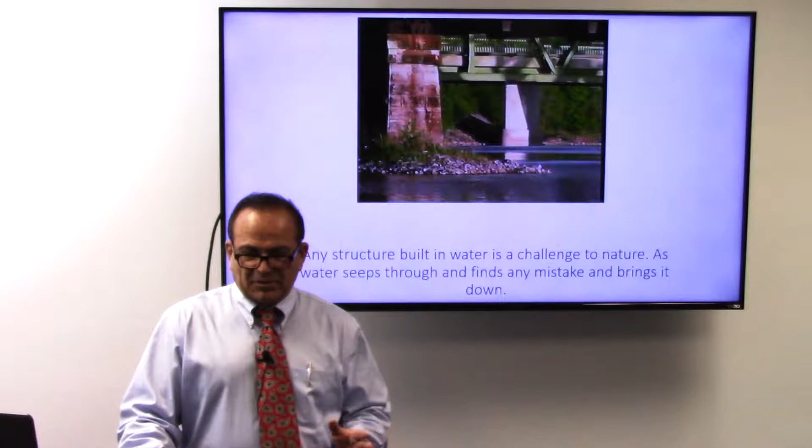At the day of the accident, a volunteer firefighter in upstate New York witnessed the accident, and some of his statements that he has made we're going to use for this course.

Schoharie Creek is a concrete bridge similar to many bridges that we see every day and cross over without even noticing them. On the day of the accident, April 5th, 1987, a large white truck was on its journey to New York through a main commercial highway. The truck was heading westbound on Highway 90, carrying a very heavy load of paper.

On the day of the accident, it started raining in the area, and it started raining very heavily. The truck driver pulled into a local restaurant to have his breakfast and then got back on the road.

As the volunteer fireman witnessed it, the water on the creek kept coming up and was rising fast. The flood alert emergencies were sounded, and the flood waters got very close, up to a point that they were going to close all the bridges. Some of the bridges were getting covered by water, and at one point Route 5S across the creek, just north of the freeway, had its western end under water.

Eventually, all the bridges on the Schoharie Creek were closed, except the Thruway Bridge. As the water started rising, a truck carrying a heavy load of paper was going through, and all of a sudden the volunteer fireman heard a noise and a big sound, and the 18-wheeler had gone into the water, followed by a couple other cars.

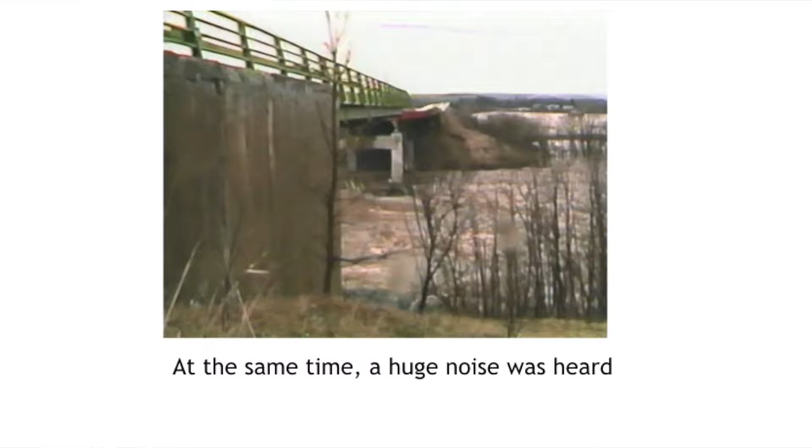Traffic came to a stop, police came to the accident site, and they saw there was a big gap in the middle of the highway, and the bridge was gone. The driver had no time to stop, and more cars followed.

The police blocked the road, and as they were surveying, the rest of the bridge started coming down. Here is some of the scene of it.

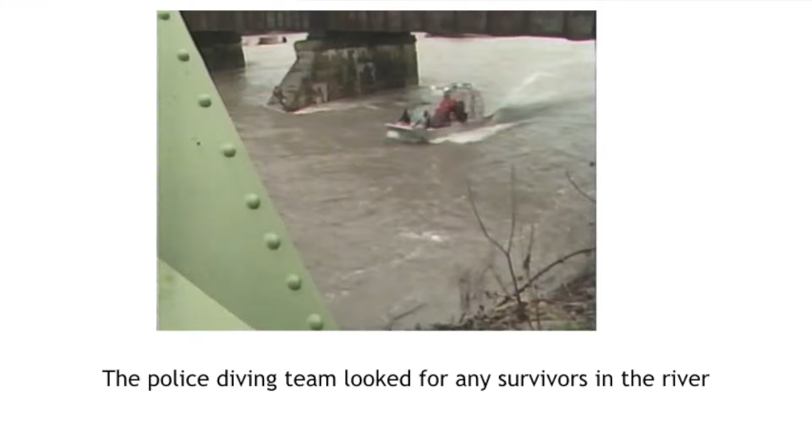At that time, some of the officials, including Governor Cuomo, came to the accident site. The police diving team surveyed and investigated the site to find any survivors, and at this time there were 10 people missing.

Governor Cuomo expressed that there was no reason for speculation about what had caused it, and they had to do the investigation until they came up with some results. The investigators looked for the remains of any human bodies for the second day, and they couldn't find anyone. 10 people had died as a result of this accident.

Now a commercial highway had been cut in half. A big piece of it had fallen into the water, and they did not know if this flaw existed in any other bridges in the state or not.

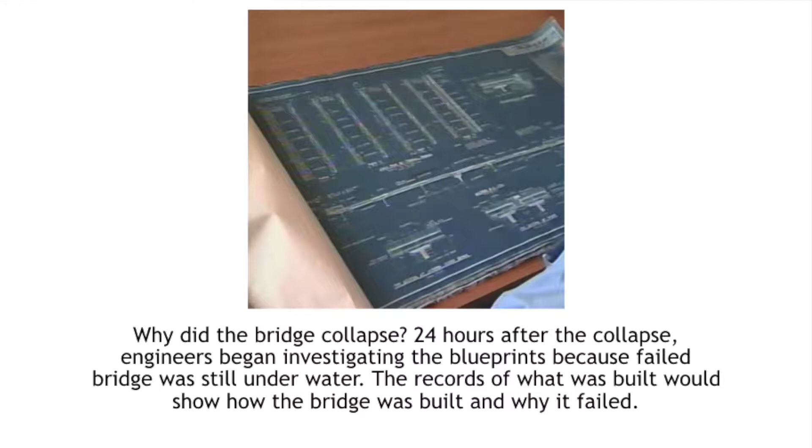10 people had died, and what they did is they decided to go over all the blueprints and see what had happened, what may have caused it, and try to find it.

This bridge had been in trouble before. There was another flood a number of years ago that had shown some problems with this bridge. The Schoharie Bridge was made of reinforced concrete and steel, and sat on huge concrete piers that rested on the creek bed. These were the bases of it.

In the 1950s, thousands of bridges and roads were built across America because reinforced concrete was simply affordable and also strong.

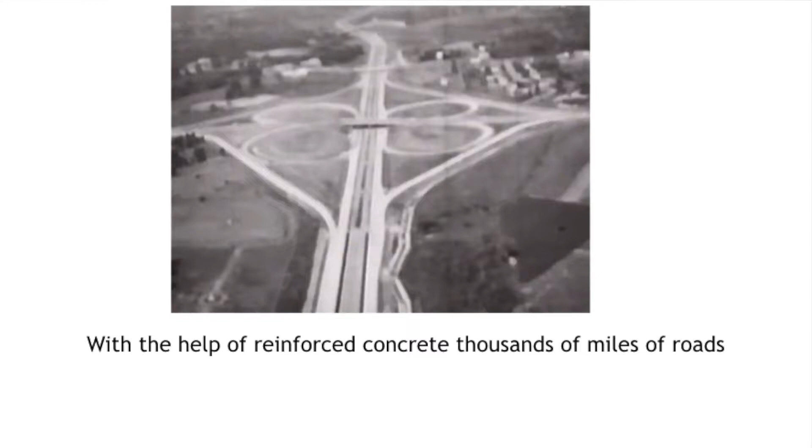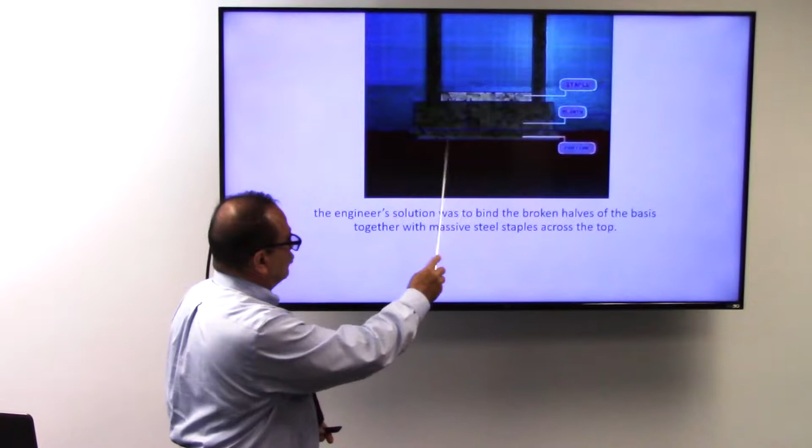Here are some examples that we see every day. The Schoharie Bridge had a problem before, because during the flood it had some cracks in the big, huge concrete base at the bottom of it on the bed of the river. So what they had done was put some steel staples on top of it in order to hold it together, and this crack does not grow any further. This was the result of a previous accident and a flood that they had.

Here is a typical example, as the water goes, of the crack caused at the base of the bridge.

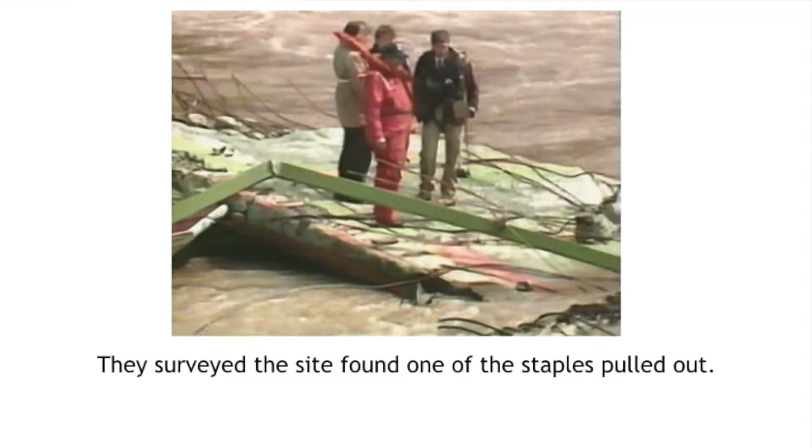Once the water started clearing, they decided to dam the area in order to get to the bottom of Pier 3 and see what had happened. They saw that some of the staples were pulled out from the base of the bridge, so they demolished the rest of the bridge in order to have access to Pier 3.

Pier 3 is this section, as you see with the red mark. The problem here is the big crack you see. They tried to drain the water, put a dam, redirect the river, and see what had caused it.

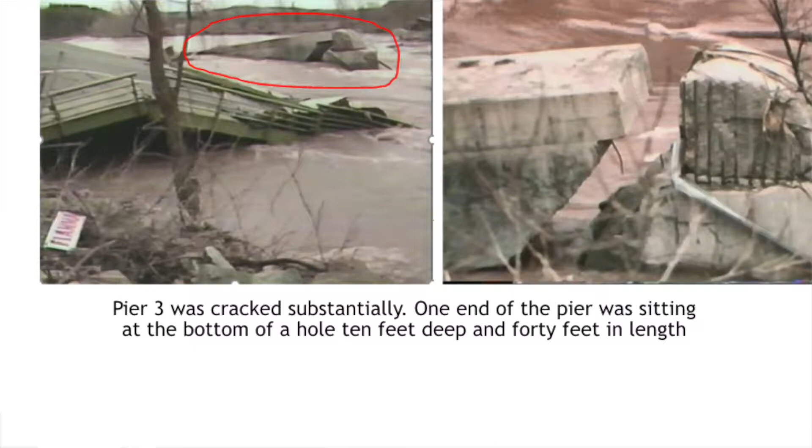Here is another picture of it. At this point, the highway is sitting at the bottom of the river. Here is another picture, and this is a blow-up of the crack showing what happened. The rest of the bridge was demolished.

This is when the water was drained and they started looking around the bridge to see all the gaps underneath and the crack in the base. They found there was a 10-foot deep gap underneath the base of the bridge, and here's the big crack that caused it. So the question was, what caused this, especially with the big hole you see underneath?

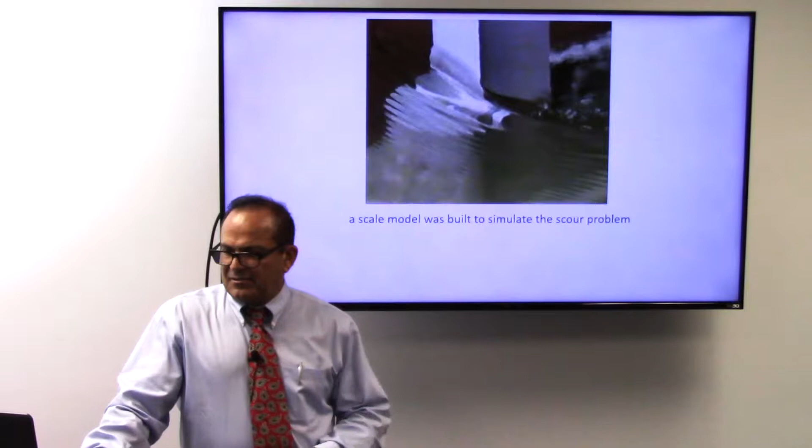A scale model was built in a hydraulic laboratory at Colorado State University. One of the biggest problems when building a bridge is scour. A scour is similar to when we are standing at the beach in the water and a wave comes in, and once the wave starts going back, it starts hollowing the sand out from underneath our feet.

That's a scour, and this is what happens to bridges also. But any civil engineer knows about scour and knows how to protect against it. When they did the simulation and test at the laboratory, they found the exact same pattern underneath the base of the bridge. The accident on the Schoharie Bridge had been caused by scour.

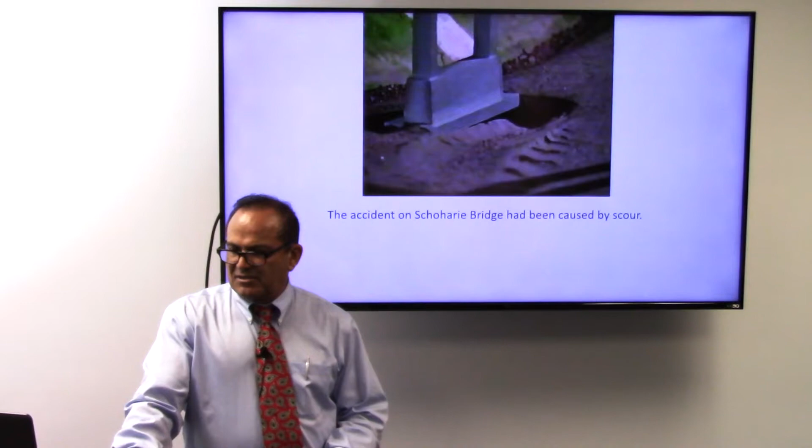The problem is, every engineer knows they have to put what is called riprap. Riprap is heavy rocks or angular rocks weighing approximately 300 pounds, used to protect the sand from being removed. This is something basic.

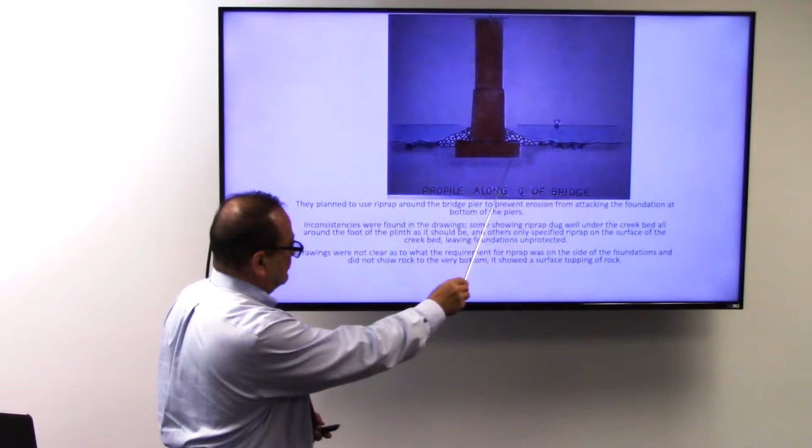So when they went back to the drawings, they found some inconsistencies. In some parts of the drawings, they showed that the riprap rocks had to cover all the way to the base of the foundation of the bridge. In others, they saw that the riprap only covered the top; it did not go deep enough.

Another problem they found was the amount of riprap actually on the scene. There was none, very, very few. According to the drawing, I believe, some 22,000 pounds was ordered.

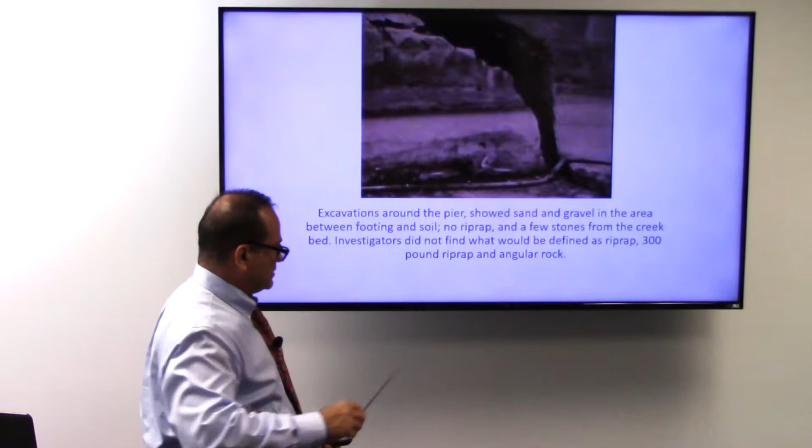In the area where they have the cracks, they found some sand and gravel, but no sign of riprap, just a few stones from the creek bed. There was no sign of the 300-pound riprap or angular rocks that they expected to see.

Here is another view of it and the cracks. They found some riprap around here, but nothing to the specification that was in the drawing.

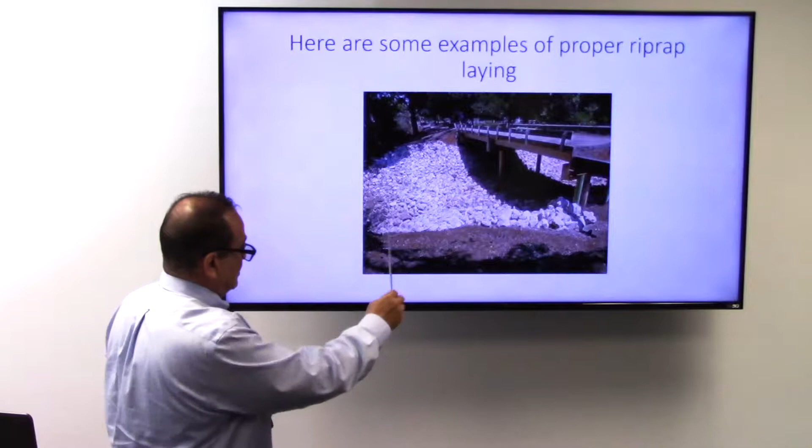For people not familiar with riprap, here are some examples of proper riprap laying around a bridge, a normal concrete bridge. Notice the amount of stone placed so that the water does not wash out the soil underneath the bridge.

Here is a riprap repair. In this bridge, since some of the soil had been washed out, they decided to repair it, and this is how it looks after the repair. Notice the amount of rocks placed in order to protect the soil so the base and foundation of the bridge does not get washed away.

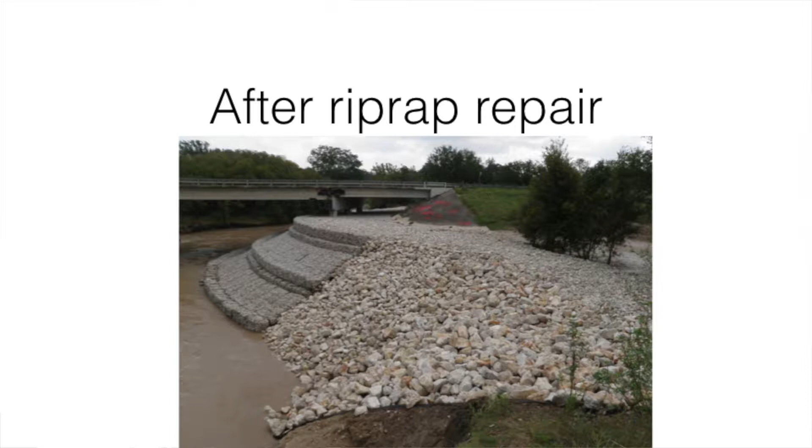Here is another view of it, and here are some more examples. Here is another example, and here is another one where they tried to repair the scour problem that they had on this bridge.

First, they drained the water from the river, or built a dam outside. They covered the base with rock, and it was back to normal. Here is how they protected the shore of the foundation of the bridge, and here are some more pictures of it.

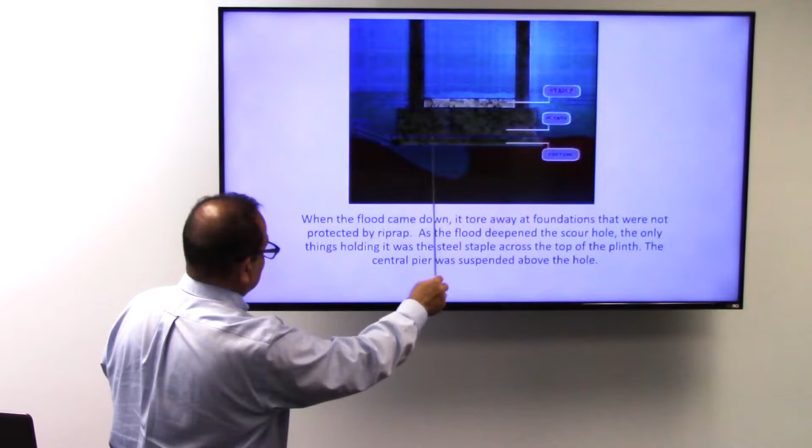Back to our case, when the flood came down, it tore away the foundation at the bottom of the bridge. Here's the animation of it. When that happened, it hollowed out underneath, so the rest of the footing, the rest of the support, is cantilevered from this edge, and all it takes is a heavy load coming down here to break this part of the foundation and collapse the bridge.

This is the test model that they did, and this is exactly what happened. At the time of the collapse, a very large truck, heavily loaded with paper, was going down the highway on the bridge, and once it went over the heavy truck on this section, it broke the foundation of the bridge that was cantilevered and caused the accident.

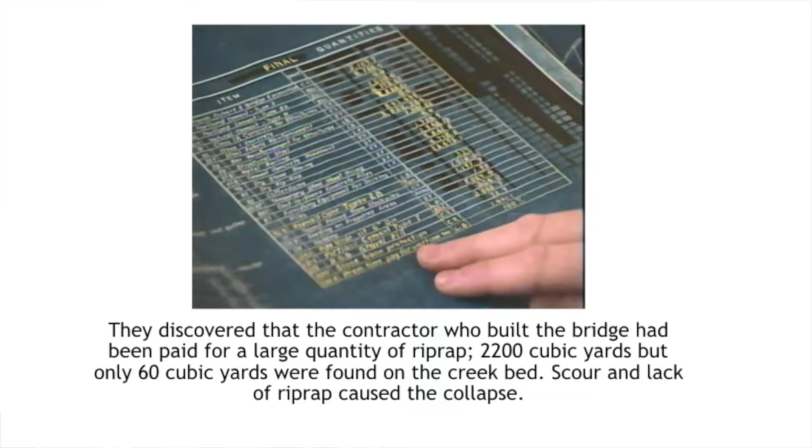According to the drawing, the contractor was supposed to deliver 2,200 cubic yards of riprap, these heavy rocks, in the area, but they only found about 60 cubic yards at the location of the accident. The scour and lack of riprap stones caused this collapse. 10 lives were lost for a few truckloads of rocks. After the Schoharie Creek accident, 500 bridges across New York were examined for proper riprap and safety. This was the cause of the accident at the Schoharie Creek.

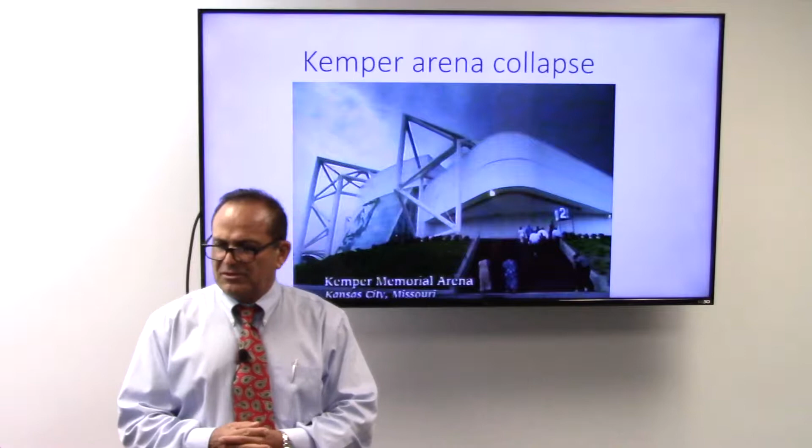Today's topic is forensic engineering. We are going to discuss the collapse of the Kemper Arena. This accident happened during the 70s. Before starting, this was a new design, and new designs can sometimes cause problems, as we may not be aware of some of the flaws that they might have.

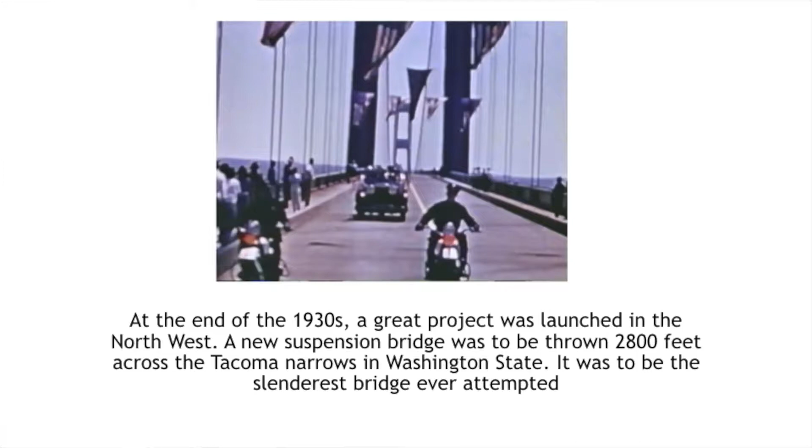At the end of the 1930s, a great project was started which was very innovative. A very slender and narrow bridge was thrown across the river, about 2,800 feet long, something very unique that hadn't been done before. But within 4 months of the bridge being built, they knew it wasn't going to last. Many people know the problem was the wind and the natural frequency of the bridge, which caused it to oscillate, and the vibration and amplitude going up and down eventually caused the failure of that bridge.

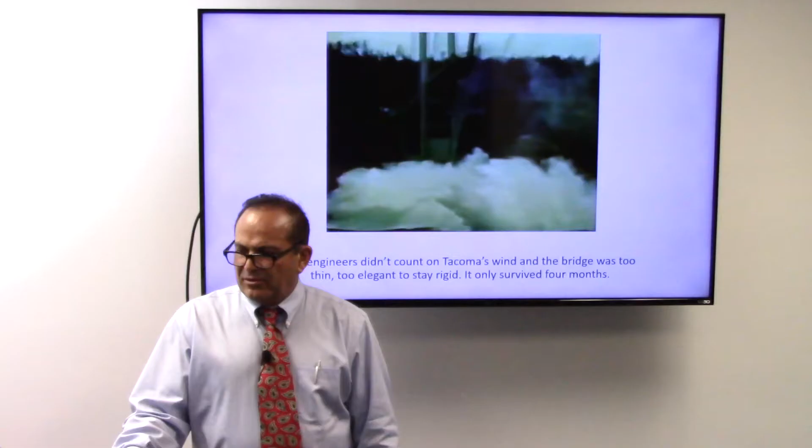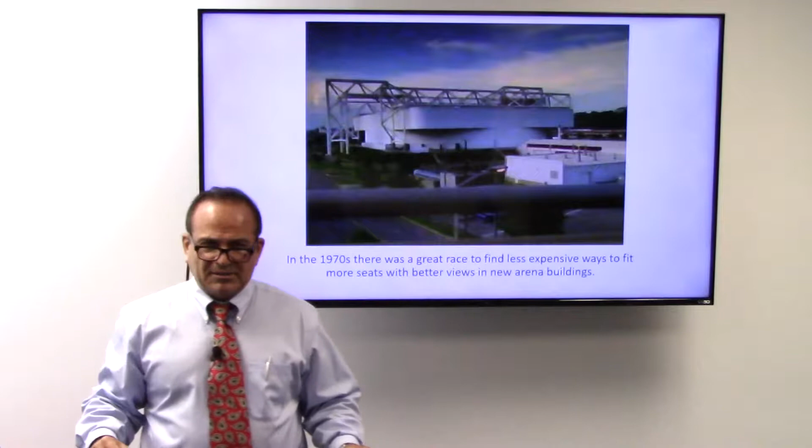Here's the arena, and the roof was going to be this space frame, three space frame designs outside that would hold the weight, cantilevered, of the roof. You see this type of design a lot in airports or arenas. This way they don't have to put a column to hold the roof, so there is no bad seat in the arena. Nobody has to look through or around a column; they can see the whole event.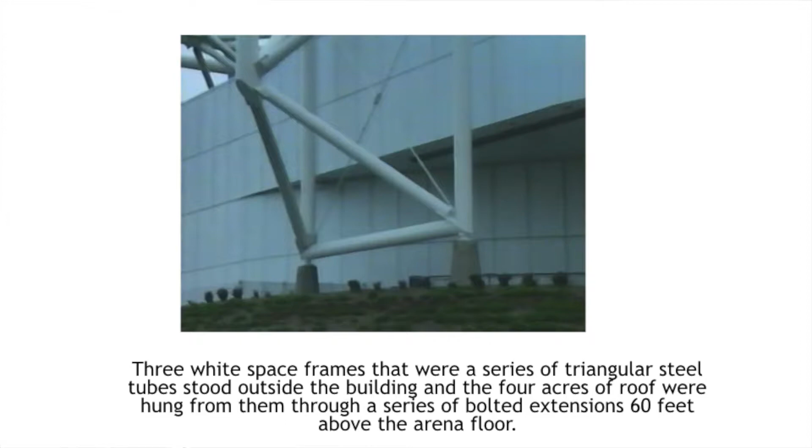Three white space frames were a series of triangular tubes, and that was all shaped. The roof would be 60 feet above the arena floor, and it was somewhat ingenious, and it was admired by a lot of architectural magazines and newspapers.

So what it would have is the cantilevered system, and the frame would hold the roof and the weight of the roof of the arena. The extensions would run across the roof, and with the attachments they had from each extension, it would get connected to the roof so it would hold the roof.

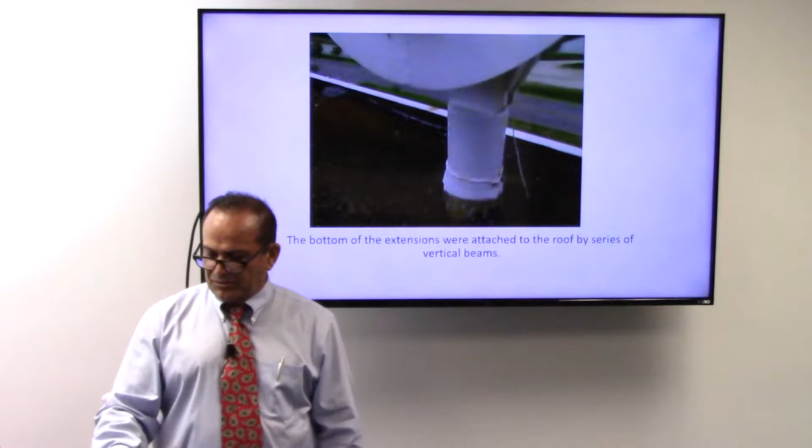Here are the designs, and each one would be connected to the floor, to the roof, with that kind of attachment. Here is the drawing that shows the vertical attachment to the roof, how it is connected through the bolts that go through and hold the weight.

On the night of the accident, there was a basketball game, and there were 30,000 people in the arena. Luckily, on the day of the accident, the weather was bad, the wind was blowing hard, and it was raining very hard. Most of the people had already left the arena when the accident happened, and the whole roof, most of the roof, came down.

That night, the city engineer called the builder saying there is a hole in the roof of the arena, and the building manager said just put a tarp over it and we'll fix it tomorrow. He mentioned to the owner that there wasn't enough tarp to cover this hole—it's huge. The next day, when they examined the accident site, they saw all the damage and debris that had fallen from the roof onto the floor of the arena. Here are a few pictures of it.

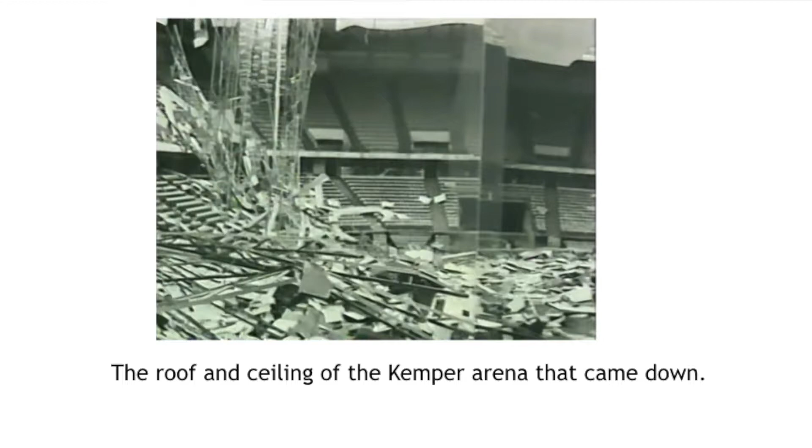Just by coincidence, the architect who designed this was in town, and he was about to get an award from the city for this particular design for this arena. So he was pretty heartbroken when he saw the building he had designed with the roof collapsed like that.

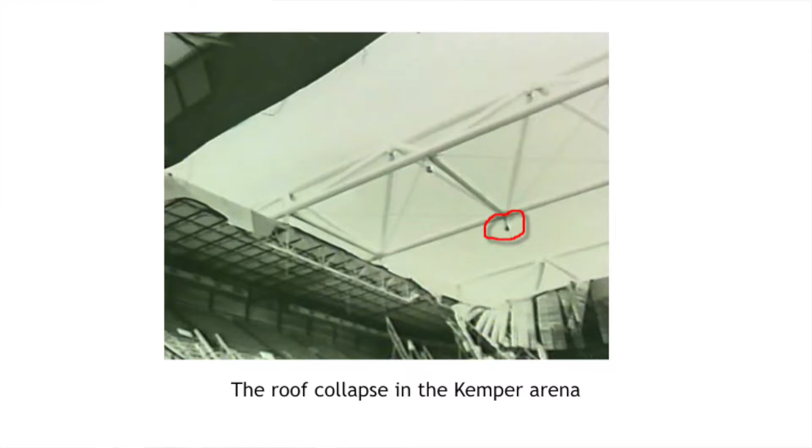When they started the investigation, here's the hole in the roof, and they noticed the attachments that connect to the roof. Here's a more close-up view—and as you see, here's this plate, but there is no bolt in it.

So the first thing that came to everybody's mind was, well, these were bad bolts—you just have to examine the bolts. The bolts caused it, the bolt caused it.

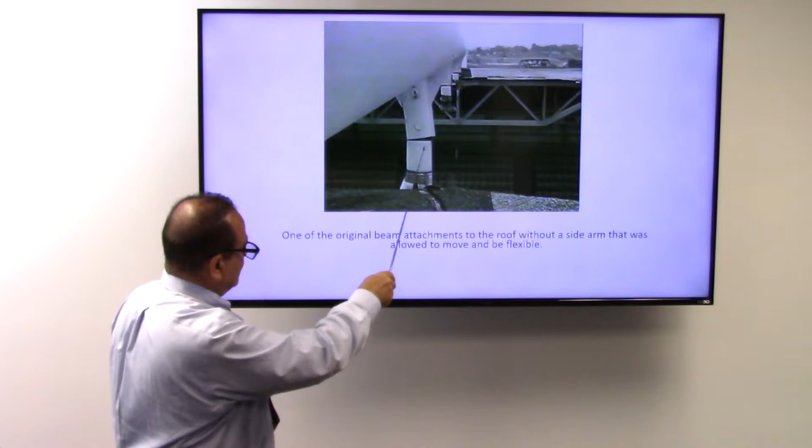Also there's another thing to mention: here is the vertical beam. Currently it has a side arm, but before it was allowed to rotate. It had a pin, so this was a moving, dynamic building which could adjust to wind, load, earthquake, or something like that.

So they started examining all the bolts—some were sampled and gathered to see what had caused them to snap. When they examined the bolts, they saw there was nothing wrong with them. They withstood the amount of stress or strength they were supposed to.

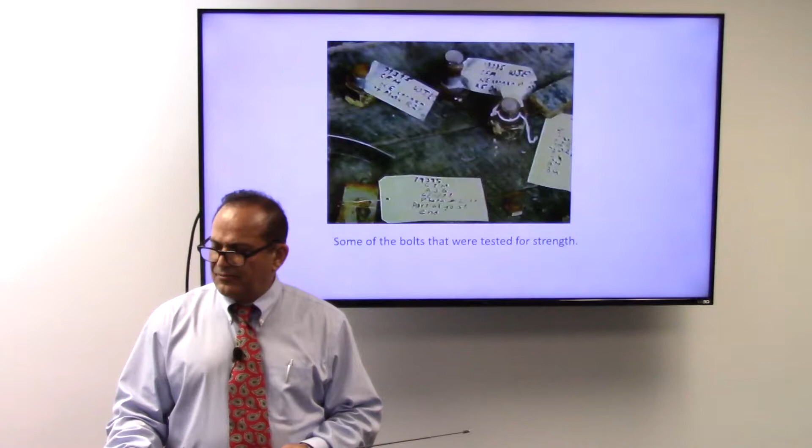So then they took another look at the design, and here's the attachment from the space structure on the roof, in order to hold the roof at the bottom of it.

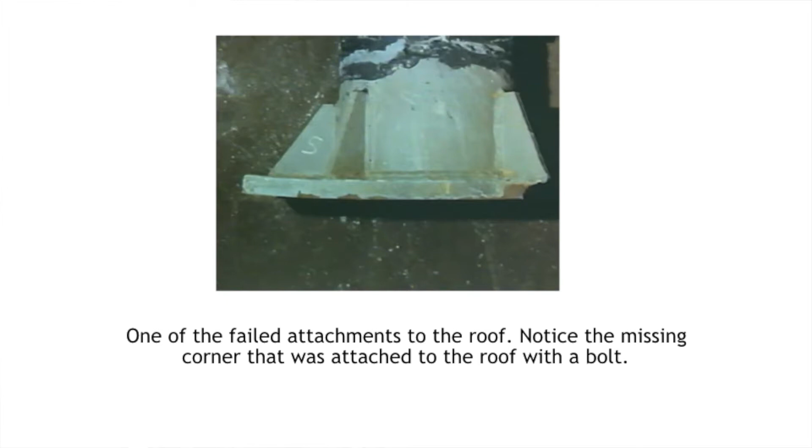Then they saw this part had failed in different shapes at different locations, and they were not uniform. For example, one has a missing ear at the hole and everything has been ripped apart, while another had bent at one end but the rest were okay. All of them, the holes, the bolts, had failed.

Also this would be the part on the roof that the plate you saw would fit on top of, as it was bolted on the bottom. So they went back to the drawing and examined to see what happened.

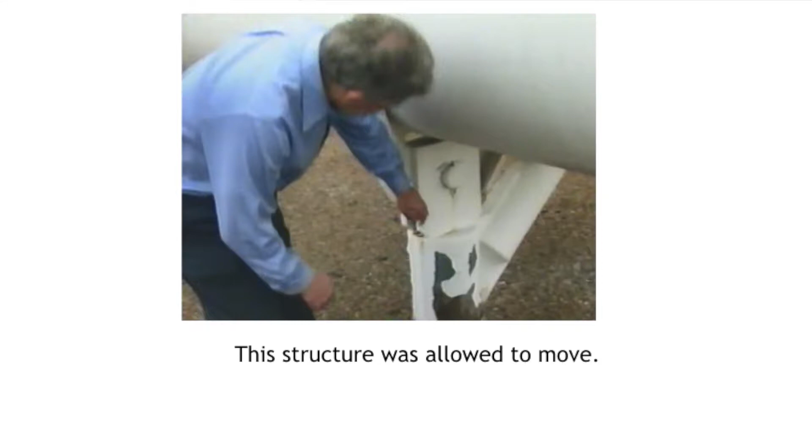What they realized was: here you have the system, the vertical shaft, which is holding the weight, can pivot around this point. In the original design, this arm was not there—so the whole thing could move, sway back and forth around the pin in this area. That arm did not exist before; they put it in after the accident.

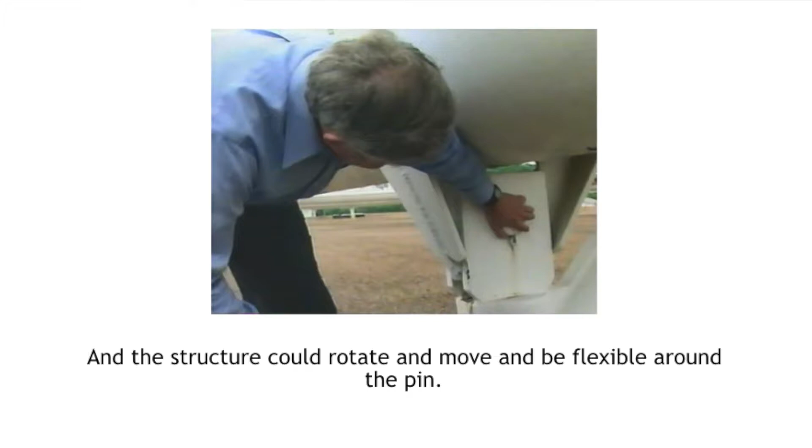So you had a movable structure. On the night of the accident, it had rained hard, and the whole roof had become a 4-acre lake. It had 8 drains, which is sufficient for a roof that size, but with the amount of rain, you had this lake on top of the roof. With the big wind coming, it was moving the water around—just like when you look at a pond and see a wave, you can tell it can move the water around in this area.

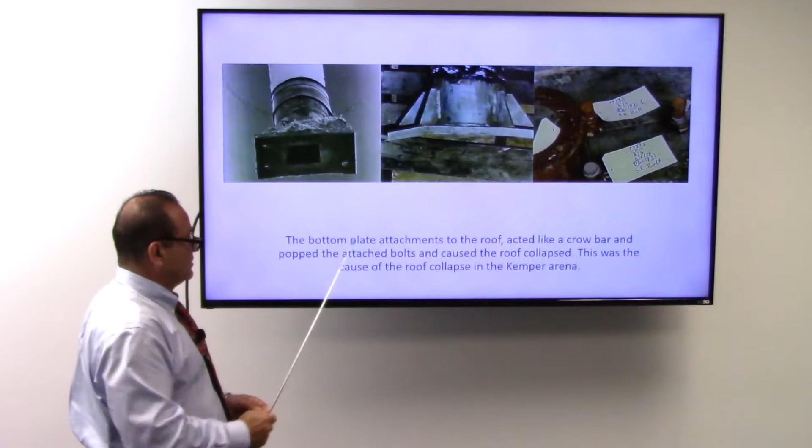So what it does is in this 4-acre lake, the wind moves the water around and finds the deepest end that it can stay, which would be the weakest point, because it applies the most amount of force. And once that load is applied, then this plate, when it can move with the applied load, it can become like a crowbar. So these plates had acted like a crowbar and had snapped all the attaching bolts. And this is what had caused the accident.

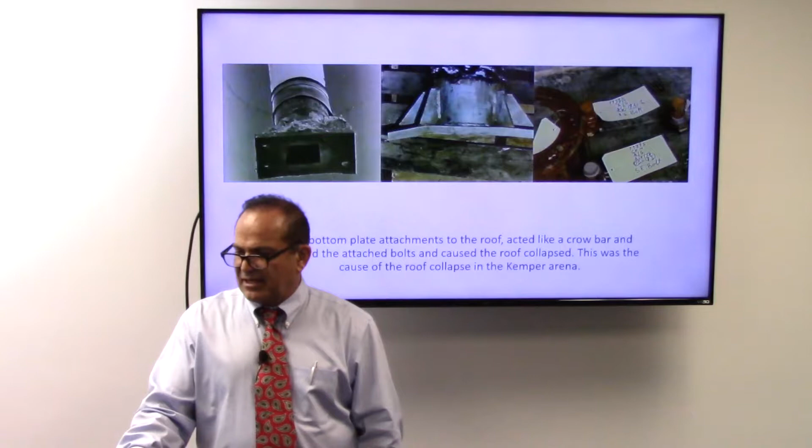At the part that was the weakest and where the most amount of force was applied, the plate had pulled and snapped the bolts, and once one of them went, the rest had followed in the same pattern. That's what had caused the accident - the design was not sufficient. It had not taken into consideration that it should be more stiff and not so flexible. So that's when they decided to redo it and add the side arm support to hold it from moving. And that was the cause of the accident in the Kemper arena.

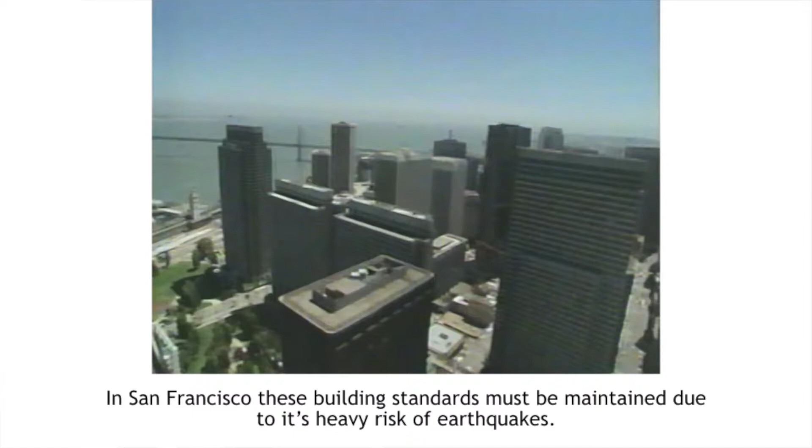But in some other parts of the world, for example in Turkey, although they have copied our standards and requirements for earthquakes, as they are in one of the regions that are very active in the earthquake zone, unfortunately they do not follow it, and as a result the result can be devastating.

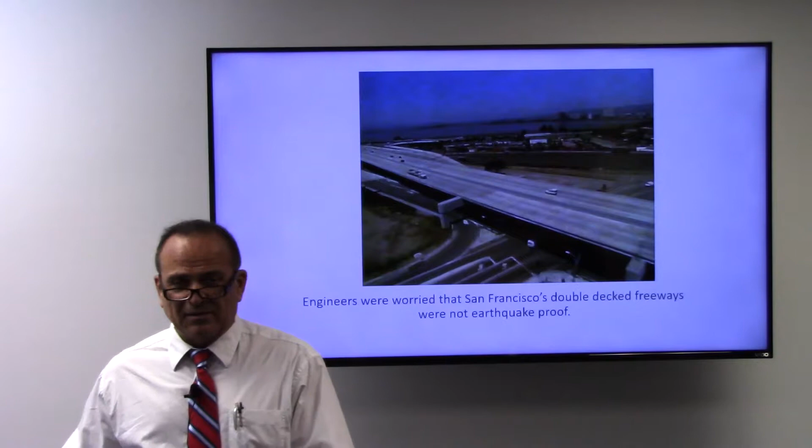In the recent accident that we had in San Francisco, the concern was the double-deck freeway that they had made. This freeway was built in 1957, and at that time it was built to the requirements that they had for the code at that moment, and it was hailed as one of the advancements of engineering. This is another view of it - there are two sets of highways on top of each other, during rush hours, coming and going.

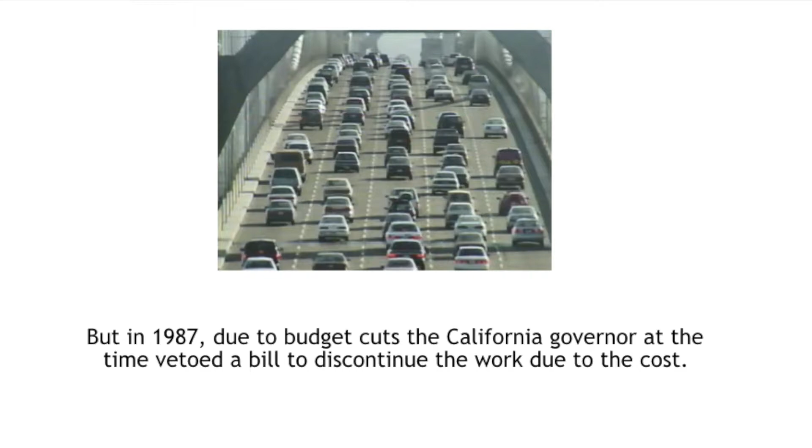Then California began a program to strengthen its roads. However, unfortunately, due to a budget cut in 1987, they decided to stop it and not do that. Here is another picture of the double-deck highway that we were talking about.

Then on October 17, 1989, actually during a game with the Oakland A's in the World Series, suddenly there was a magnitude 7.1 earthquake in San Francisco. This not only shook the stadium, but all the surrounding roads and buildings were damaged.

This was a big earthquake, and unfortunately most of the damage was on this double-deck highway that was built in 1957. Here is some of the pictures. It's a two-tier highway, known as the Cypress structure, and there are some areas of it that completely collapsed and sandwiched some of the cars and people underneath.

In some of them, it was so heavy that it completely crushed even the engine block of a vehicle. We're going to see some more pictures of it.

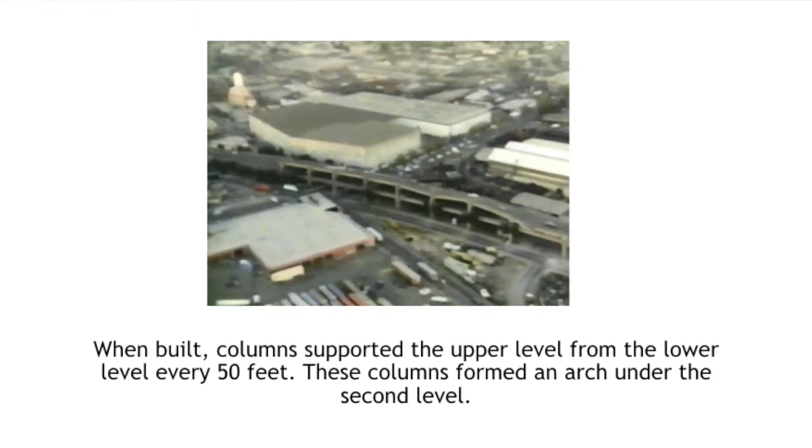This was designed so that every 50 feet there was a column to support the structure on top, but they still didn't know why. From this highway there was a stretch of 1.5 miles where they had seen all this damage, but the rest of the highway was okay, and they couldn't understand what had caused it.

So here is more pictures of it, and I believe I have a video of it too. Here we go. This was taken at the time of the accident, once it had just happened, as the highway had collapsed.

I have another video of this also. Here's another video as the highway had collapsed on top of the bottom one. It had pancaked.

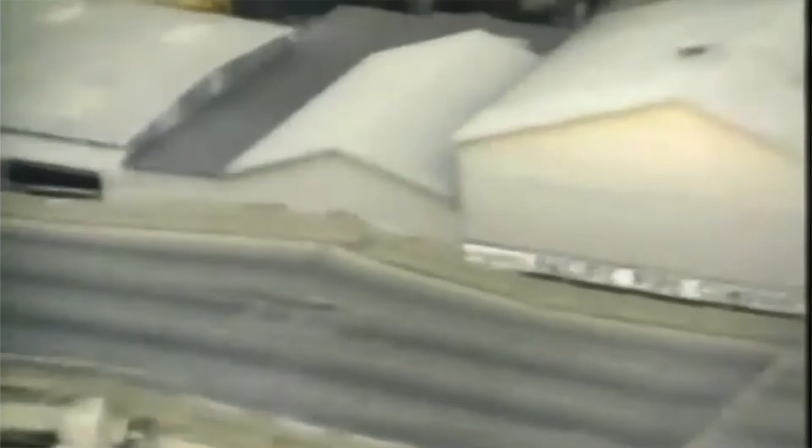These columns, as I mentioned, this is before, of course this has since been fixed. Every 50 feet there were columns that supported the road above, as cars were going underneath.

People were very curious why this stretch of 1.5 miles had collapsed. The result was pretty devastating. When they had built this highway, some of the notables were there, and this is right when they had built it. This is the earliest video they had from it, and it was hailed as one of the feats of modern engineering.

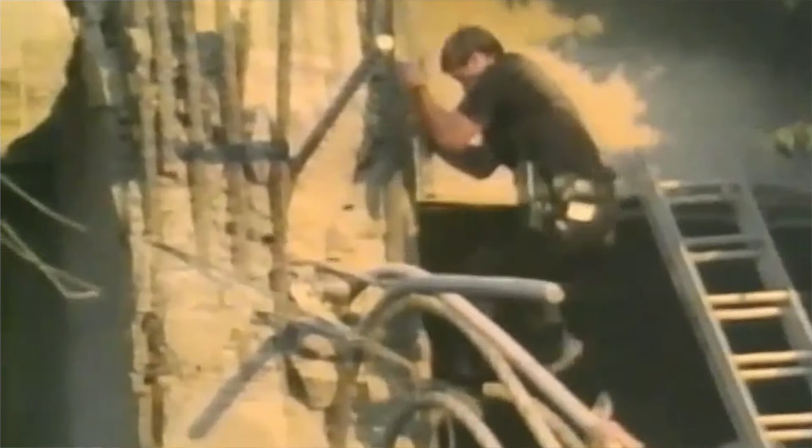Now this is how it looked after the earthquake accident. Some of these iron rods you see sticking out drew the attention of investigators trying to figure out what had caused it to collapse at the base of the highway.

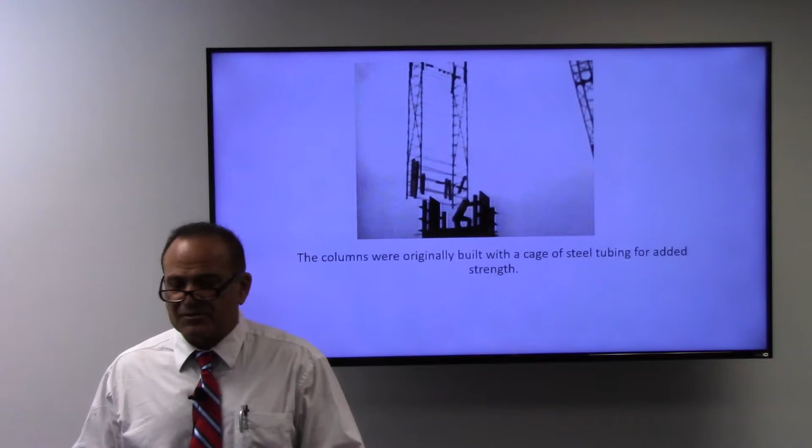These columns were supposed to be very strong. In manufacturing them, they used a cage of steel tubing within the concrete to make it stronger. One thing they noticed was that these tubings were not strong enough and could have been made stronger, so they decided to beef up the support. But they still couldn't say for certain that these confinements were the only reason for such a large amount of damage along this 1.5 mile stretch.

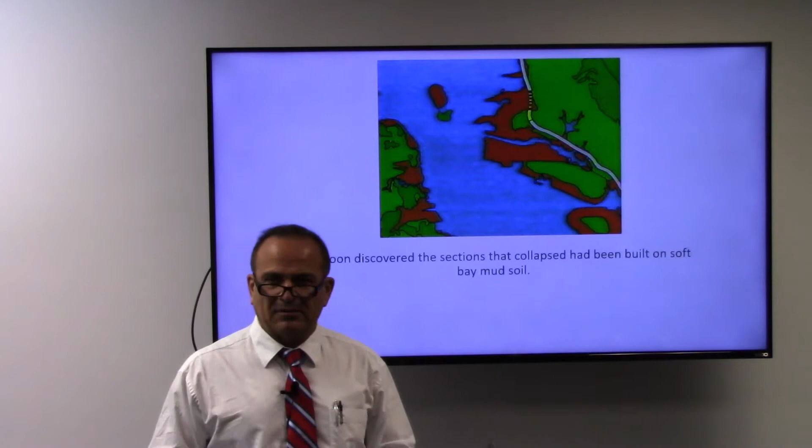So they started looking at the soil to see if it made a difference, and discovered that the stretch of highway with the most damage was where the Bay Area has soft soil. There was always a conception that soft soil at the time of an earthquake would give and absorb part of the vibration and shaking. However, they decided to do some testing on that.

Earlier when they were building it, this is a short footage of them putting in all the pilings in the soft ground of the Bay Area.

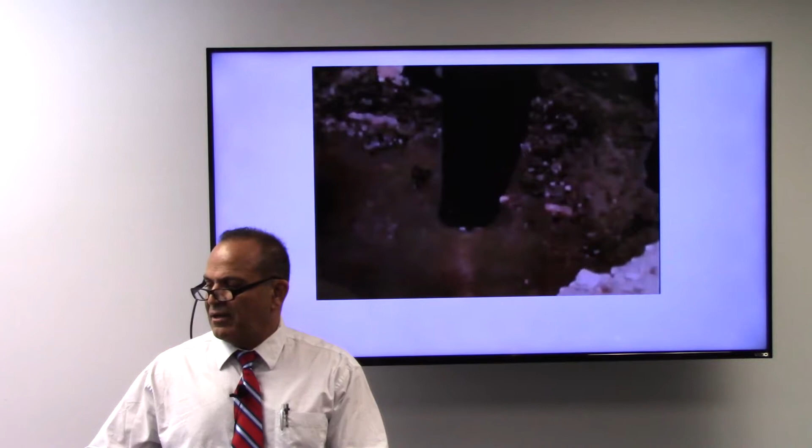The scientists put in some instrumentation and did testing, and to their surprise, when testing some of the aftershocks of the earthquake, they realized the soil shakes much more violently, sometimes even twice as much, in soft ground compared to regular ground.

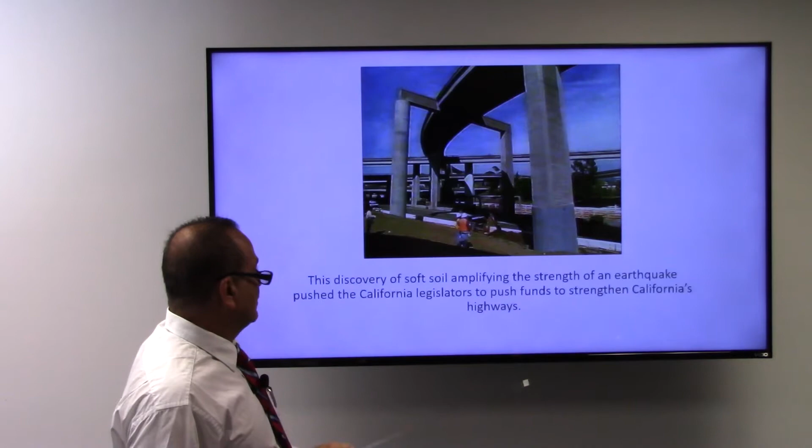As a result, they started beefing up all the highways in that area. For example, all the connections were strengthened underneath and on the sides of the highways. Here you see they beefed it up all the way to the top, and also found other ways to strengthen the connections between highways stacked on top of each other. Here is another example of how they beefed it up compared to the past.

Across the ocean, they also had an accident in Japan. In 1995 in Kobe, Japan, there was a big earthquake which caused some 5,000 people to lose their lives, and since there were a lot of wooden homes in town, they caught fire.

One of the areas where a lot of damage was seen was at the port. The difference was that some of the damage in the city was significant, but newer construction built to a better code was able to withstand it and handle it better.

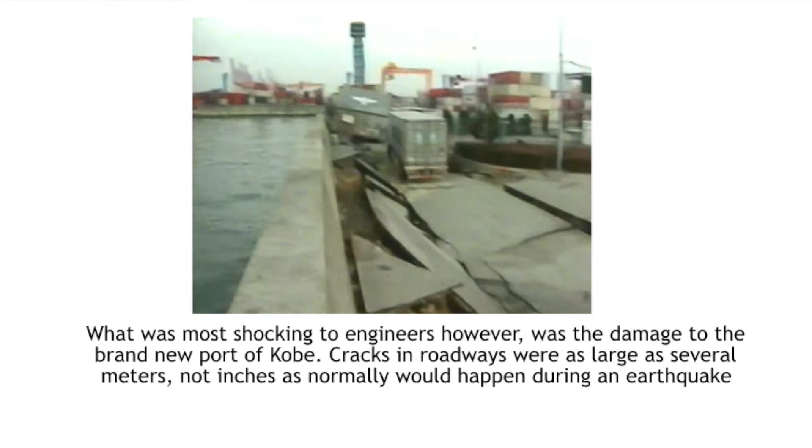One of the interesting things was that at the port of Kobe, they noticed a lot of very large cracks, such as these. Usually cracks would be a couple of inches, but they saw big cracks up to a couple of meters on the road, and they did not know what had caused it.

This was a somewhat new port that had been built, and they had never seen earthquake damage of such magnitude causing these cracks. When they looked closer, they noticed a muddy substance, mud, coming out of the ground at the places hit by the earthquake.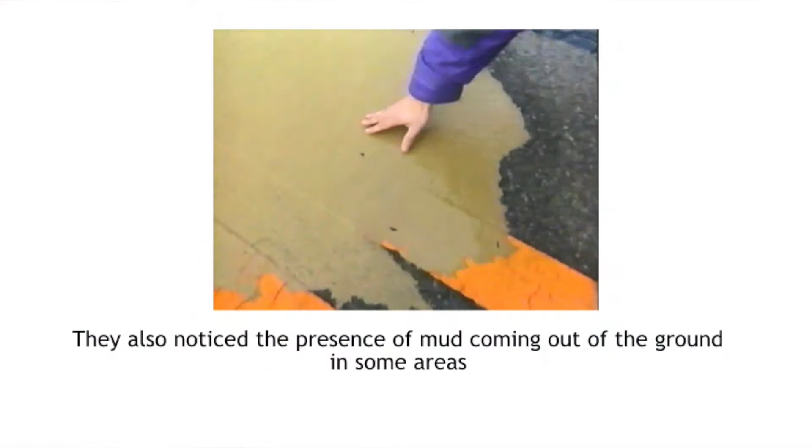This is at some part of it. Here is another part that shows the mud, very soft, refined mud was coming out of the ground, which showed what has happened is called liquefaction.

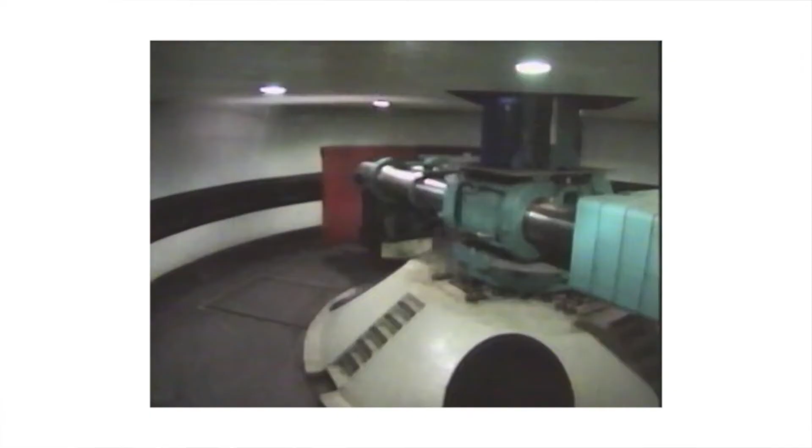They simulated this at the lab at Army Corps of Engineers, probably one of the largest labs in the world that can do this. Liquefaction is when the soil and surrounding ground area turns to mud and starts engulfing the building. Sometimes the building completely collapses as a result because it no longer has a foundation. This again was done at the lab at Army Corps of Engineers. I believe we have footage of it.

So here they put some regular models on the soil to see how the water effect will cause the soil and sand to lose its bearing strength. If you have any structure sitting on top of it, it's just going to sink in. This is actual footage from the airport in Kobe where water was gushing out from the ground. This is not a broken water main line or anything like that. This is what is called liquefaction.

We have another video on that. This is around the same time, at the airport - the same footage but a different scene of it. So this is one of the things that happened during the earthquake: the liquefaction.

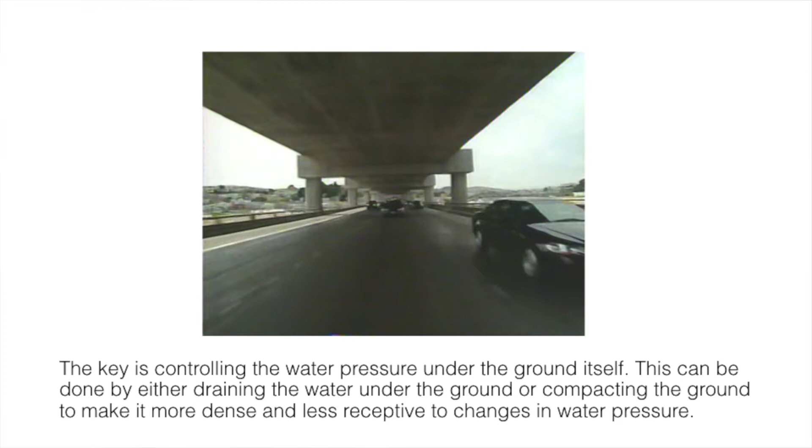What is the cure for that? Especially in areas like San Francisco, either they have to drain the water from underneath the soil or simply make the soil more compact. That would be the solution for liquefaction.

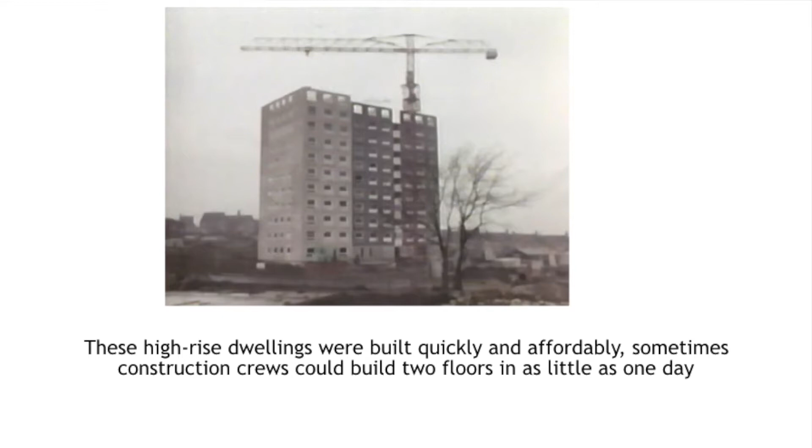These high-rise buildings were constructed in a way that was very economical and affordable, using concrete blocks that each one would get lifted off by a crane and put in place, and all the seams around it would be sealed with concrete, so it would be cubes on top of cubes. As a matter of fact, it was so efficient that on an average day they could build 2 floors on top of each other.

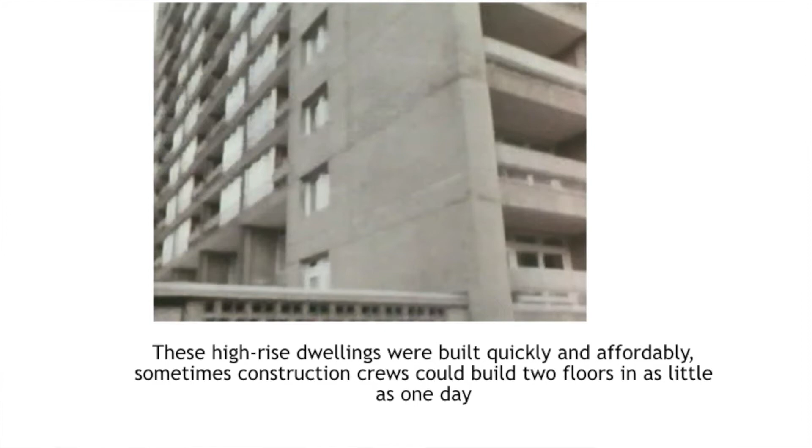So some of the areas that were hit during the bombing and destroyed were very quickly revitalized using this method. A lot of people could move into these beautiful, new, state-of-the-art buildings. This is one example of it. As I mentioned, they could build 2 floors a day.

However, on May 16, 1968, 3 weeks after one of these buildings had gone up - a building known as Ronan Point - a lot of people who were looking forward to moving in were disappointed. Here's a few more pictures from different angles of the building. This was a 22-story concrete building.

In one morning at 5:45 a.m., one of the residents goes to the kitchen to boil some water for hot tea. As soon as she lights up the match, unfortunately there is an explosion, and after the explosion she sees that part of the wall and the roof of her kitchen is gone. She herself was hurt and was taken to the hospital.

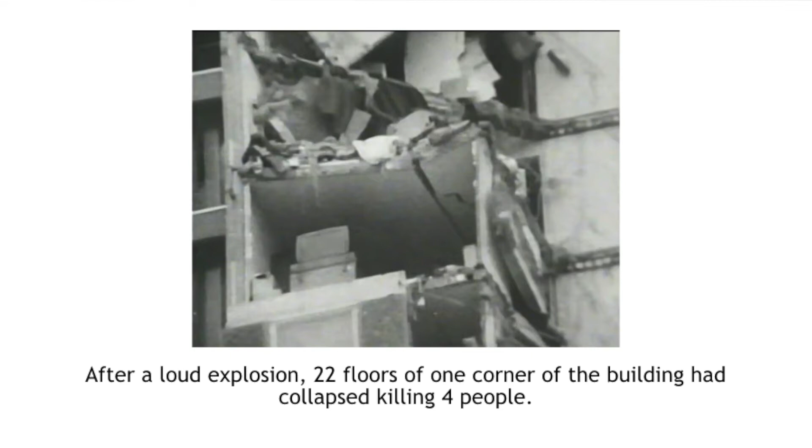So there was a quick inquiry and investigation into what caused it. During the accident, 4 people died, I must admit. They realized that the cause of the accident was a faulty gas line connected to the oven, which had leaked and caused the explosion. But what they could not understand was: if this was just one floor, why did it cause the rest of the floors to all collapse?

So this is a short video of the site, and the rest of it had to be brought down in order for the repair of the building or whatever was left.

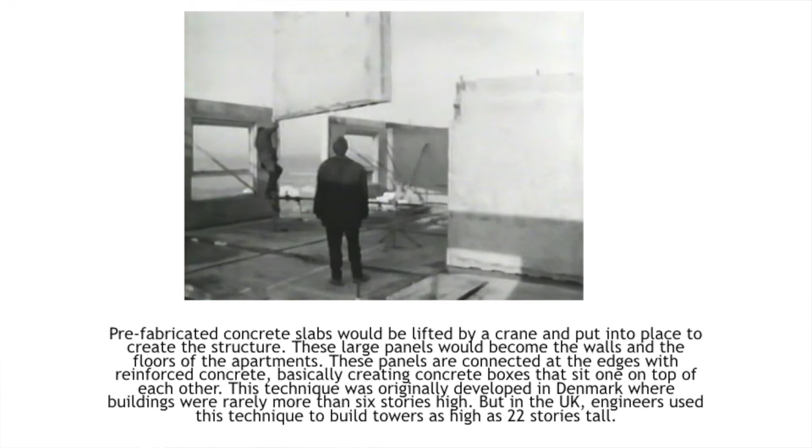When they looked into it, they realized that perhaps something about the method - bringing down these concrete panels and putting them right on top of each other - was the problem. This method was being used, I believe, in Denmark, but over there they were only making buildings up to 6 stories. Over here, in the UK, they had put them all the way up to 22 floors. Here is a concrete panel construction, and here's a video of it.

As you will see, when they bring the walls and the top, and once they have them on top of each other like a cube, they seam the edges just with the concrete. So it would be cube on top of cube.

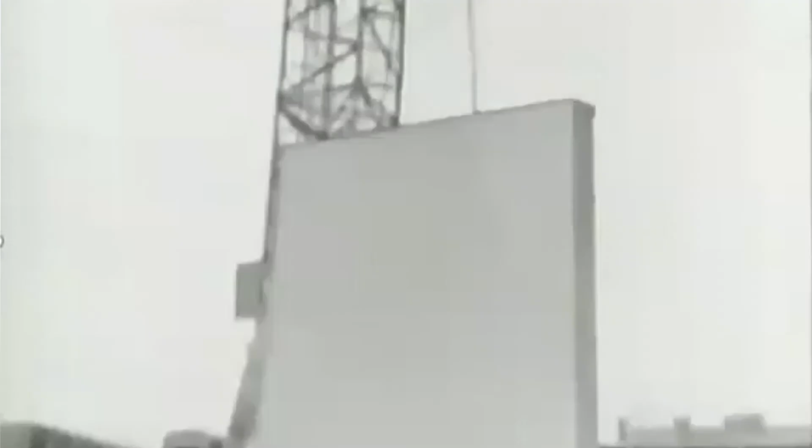But the problem with this system was, it's like a house of cards. If one card falls, the rest of them will also fall. What they had not anticipated was that in Denmark, they do not use gas for the stove - they have other means for their kitchen.

So they had not taken into consideration the possibility of an explosion inside this cube. If you imagine a cube, once the explosion has happened, the top has gone up, the roof has gone up, and the pressure of the explosion pushes the walls to the outside. Now the floor, which is the ceiling, unattached, will come down to the ceiling of the floor below it. And that is how the whole thing had gone down.

After they found out the flaw with this, it was actually pretty big, because they had built a lot of buildings using this method that had to be corrected.

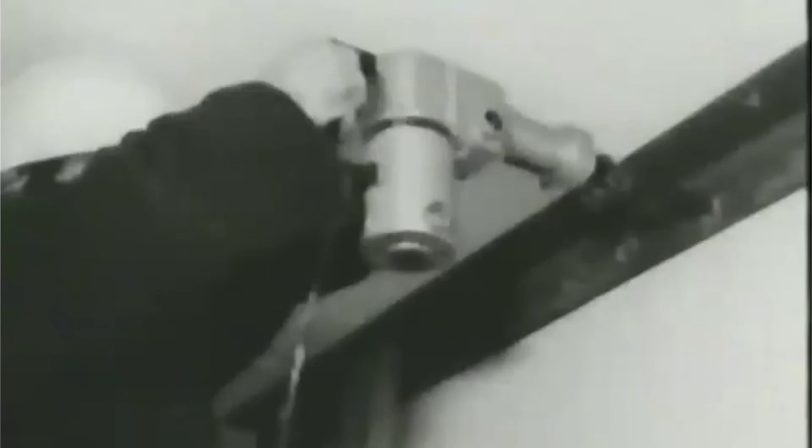So what they had to do was reinforce these walls with some panels. They had to bolt them through the walls, so in case of an explosion, it does not fall apart again. Here is the method they used for putting the bolts - they were putting a panel like an L-shape type, and would be bolting the walls to the next wall, and also this would hold the roof, and also on the bottom it would be for the floor. So at least there would be extra help in case of an explosion.

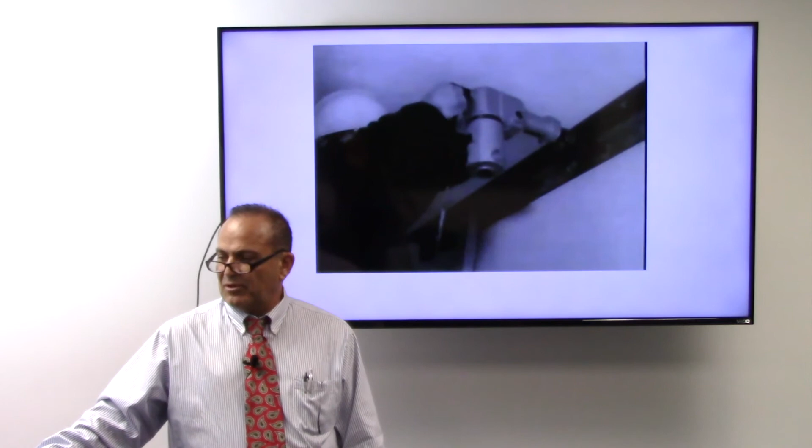So as I explained, they went ahead and did that. But some of the buildings, they could not do that, and they had to bring the entire building down. The ones that could be remediated and stiffened up and secured, they did. And the ones that they could not, they just went ahead and brought the whole building down.